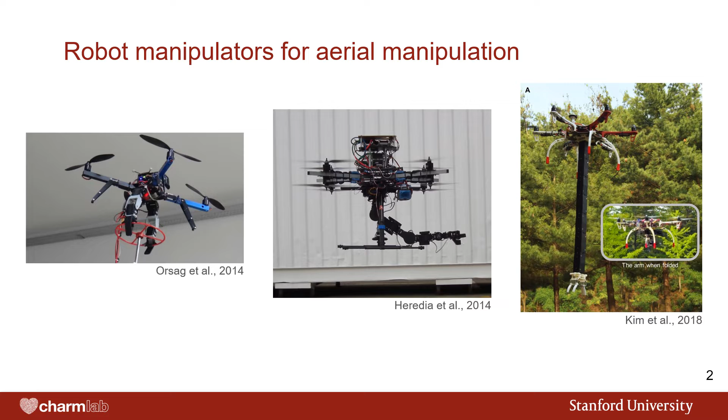Retractable arms could address this issue, but prior work has focused on retractable arms with just a single degree of freedom, limiting their reach. In this work, we demonstrate a low-cost, high-extension, planar, 3-DOF cable-driven manipulator shown here.

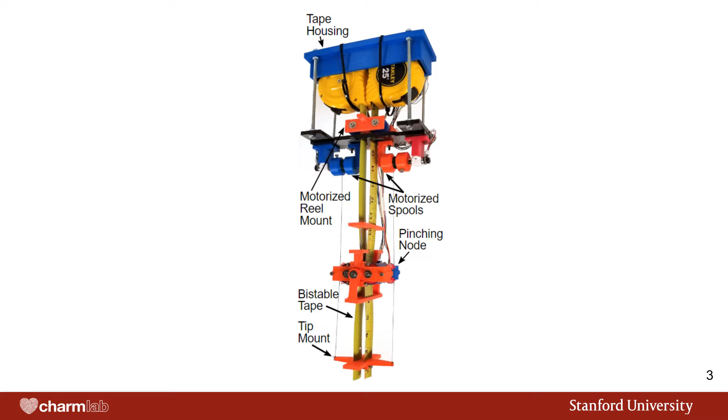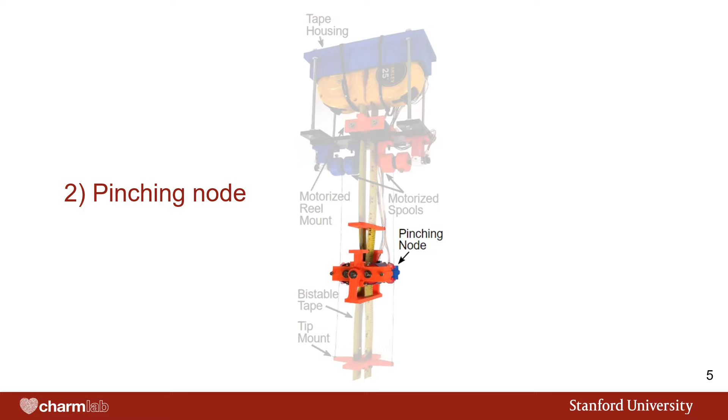The manipulator consists of 3 main parts. First, 2 bistable tapes are arranged back to back. Second, a revolute joint is formed by pinching the tapes together using a pinching node. And third, the tapes and cables are stored in motorized cable and tape spools.

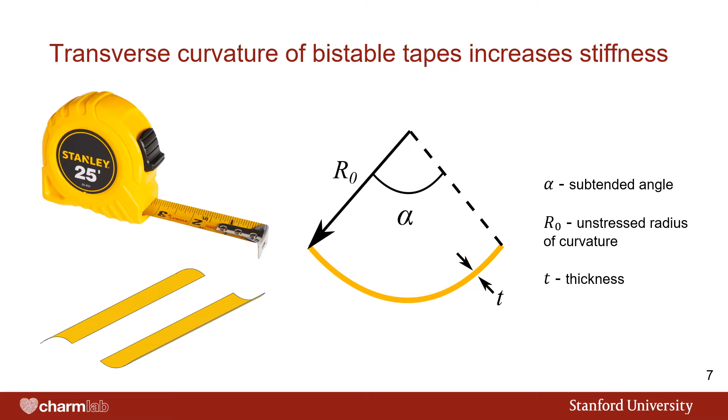Back-to-back bistable tapes form the backbone of the manipulator. Bistable tapes, also referred to as tape springs, are fabricated with a transverse curvature, which greatly increases their longitudinal bending stiffness. They can be stored around spools, enabling deployable structures with high extension ratios, such as antenna booms. We use tape springs from off-the-shelf tape measures in our work.

Prior work has used bent tape springs to form hinges, but this bending process has been subject to a snap-through instability. This makes it infeasible to control small bend angles with such hinges.

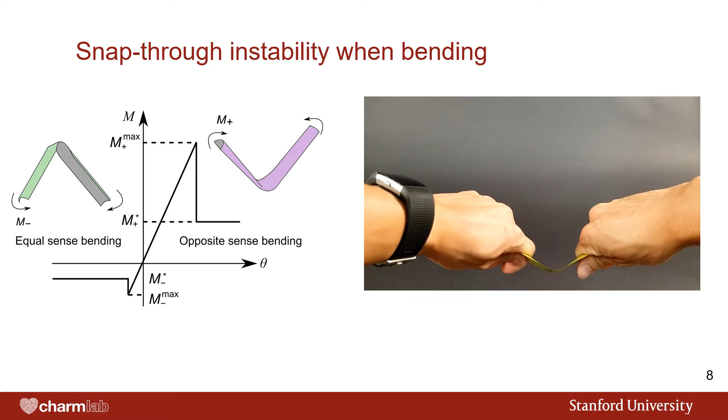To increase the overall arm stiffness and enable more precise control of small angles in our design, we place bistable tapes back to back and form a hinge through changing the transverse curvature to locally flatten the tape. Through pinching the tapes, we locally set the transverse curvature to 0, which greatly reduces the energy required to locally bend. We conducted an experiment with back-to-back tapes and demonstrated how pinching can eliminate the snap-through instability.

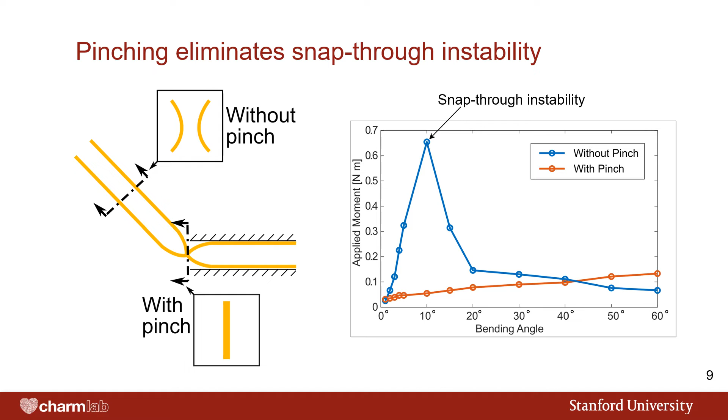This pinching is accomplished through a pinching node, which consists of 2 motorized rollers. The spacing between the 2 rollers is preset such that the tape must flatten when passing through. We can observe this behavior in the video to the right. The node uses the tapes as a linear track, and by moving up or down the tape, it can alter the location of the pinch, creating a movable revolute joint.

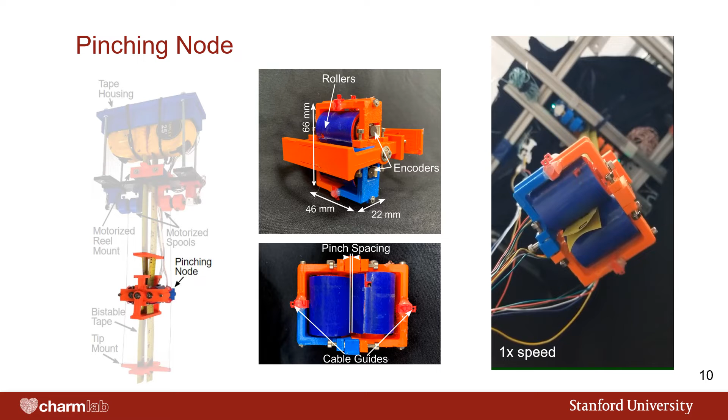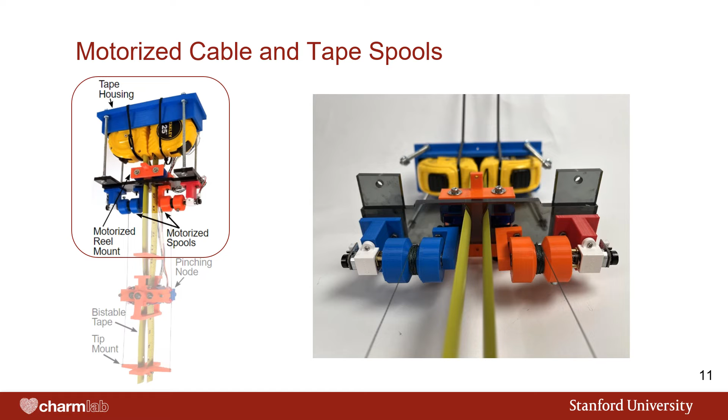Finally, there are 2 additional sets of motorized spools, one set which controls the extension and retraction of the tapes, and the other which controls the lengths of the 2 cables which run along the side of the arm. By changing the cable lengths, we can bend the arm.

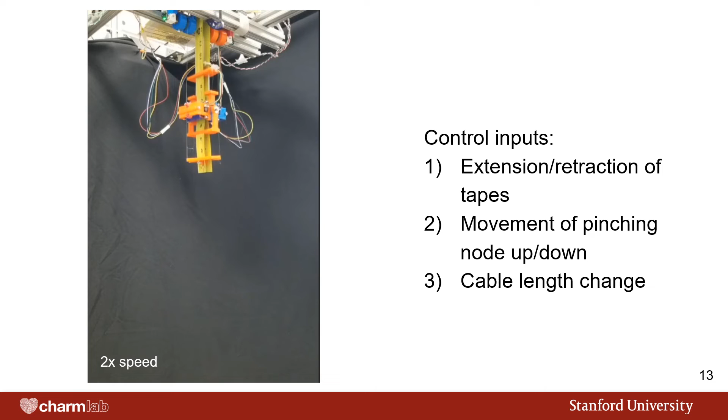Now, I will briefly highlight a few of the demonstrations which we conducted. This video illustrates the 3 control inputs of the bistable tape manipulator performed sequentially. First, we have length change of the tape. This can be either extension or retraction. Second, we have movement of the pinching node along the tape. And finally, we have tensioning of the individual cables, which produces bending of the overall manipulator.

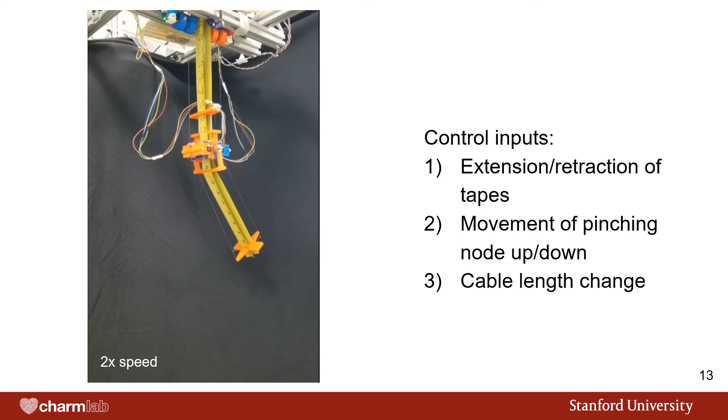In this paper, we derived a kinematic model which relates the position and orientation of the end effector as a function of the control inputs of the tape and the position of the pinching node. The position of the pinching node is dependent on the arm length. By controlling both, we can maintain a constant node position.

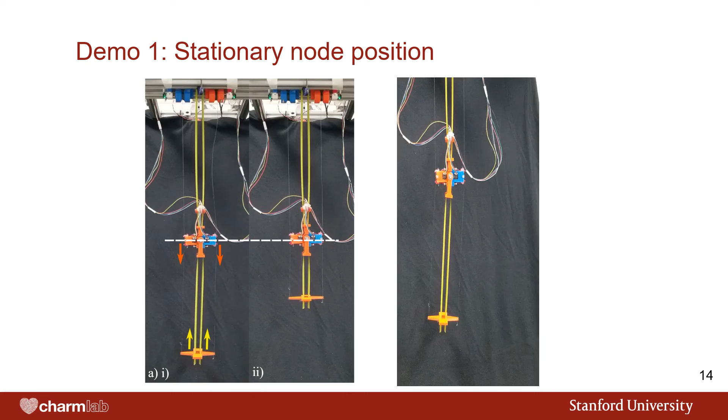We show examples of achieving various end effector positions and our ability to achieve different orientations for a single position. We also show how we can maintain a given end effector angle independent of the length of the manipulator and the ability of the manipulator to lift weights, such as the 200-gram weight shown on the right, to specified angles.

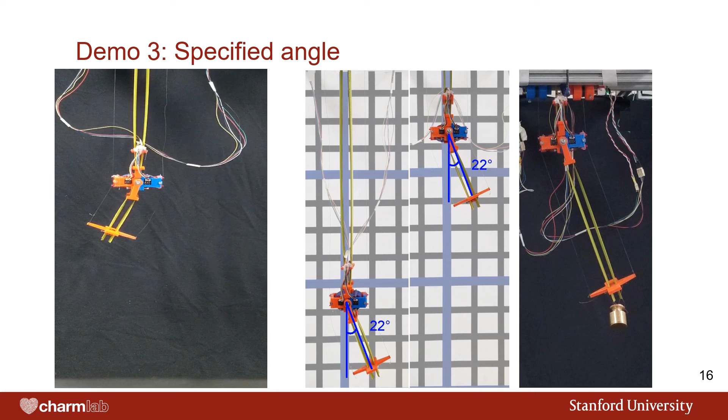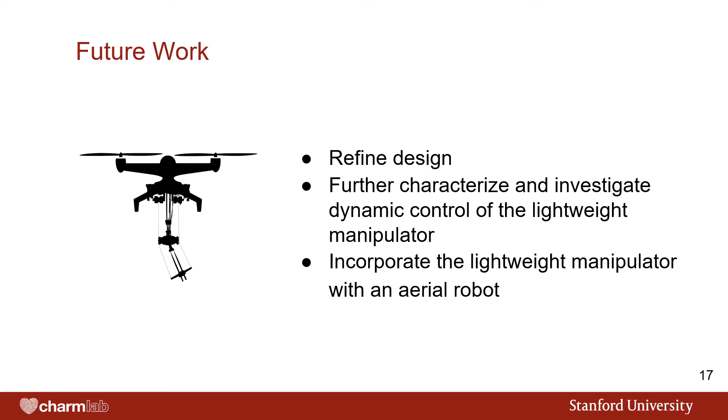In the future, we plan on refining this proof of concept design, further characterizing and investigating failure modes and dynamic control, and ultimately incorporating this manipulator with an aerial robot.